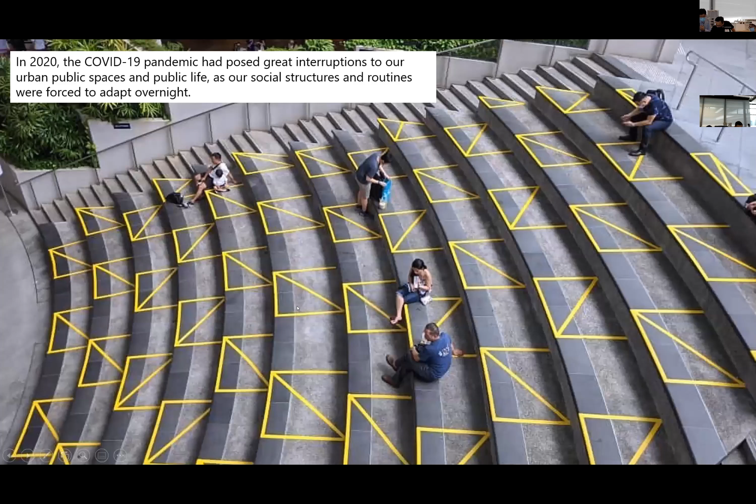As I mentioned, last year we had a lot of new challenges, especially in public areas. You can see these kinds of measures being implemented everywhere. This is in Buona Vista, Star Vista. This step ramp used to be a place where many people congregated, watching performances or just hanging out. But during the pandemic people couldn't sit so close to each other, so they had these kinds of measures.

And even in the hawker center, this is in the East Coast, the very popular hawker center, you can see people spreading out. Especially as architects, we are very interested in how spaces are being used and redesigned, so you see yellow tape everywhere. I call it tape architecture. There's no such word, by the way.

But it's just how we rethink our spaces through very creative intervention, something as simple as using yellow tapes. But on the other hand, could that also offer a new kind of perspective, a new opportunity by taking advantage of fewer cars on the road, like during that time? Now I think the cars are all back, but when we have fewer cars it is good for the environment. At the same time, perhaps we can take advantage to widen the lane and create better public spaces so people can be more spread out.

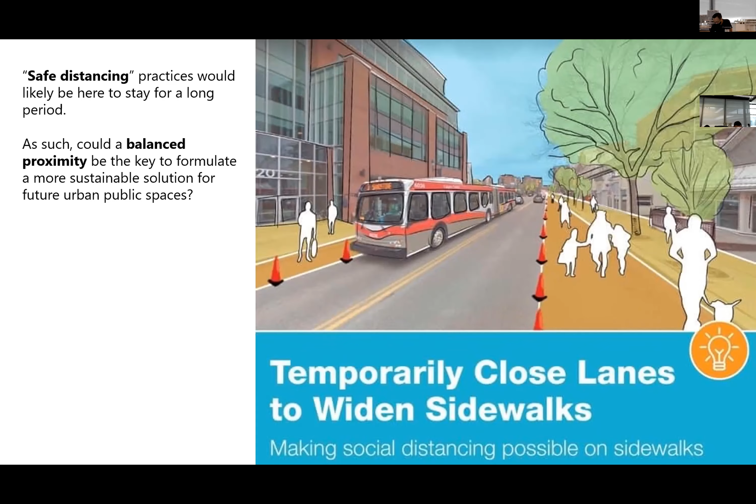So one of the ideas we discussed is using soundscape. Sound, as you know, is very intangible. We hear it, we can't see it, but can we use sound as a way to restructure and rethink our public space to create a new form of urban conviviality?

Our studio is looking at adaptive public furniture, furniture design that can adapt to different situations. Let's say two years later we are back to large scale gathering, so we can rearrange some of this furniture to adapt to the situation. As we are opening up, we can also see how different furniture layouts can induce different kinds of public behavior. At the same time, we don't want to get rid of public life, social life. We want to bring back public life, but in a safe manner.

So how can we do it safe and sound? Pun intended.

So what happened was, URA at that time, we were already discussing that we want to help see how our design can improve the Marina Central area.

Have you been to Marina Central? I see not, how many of you haven't been to Marina Central? Oh, you haven't, are you from overseas? But it just never happened that you wanted to visit the place. Oh, actually that's a good example. How about you, where are you from? I'm from India. I came in 2019, and then in 2020 the lockdown started. Oh, probably didn't get the time to go. You don't get a chance to go, right? And also perhaps there's not much incentive for you to go down. So some of you who've been there before, do you think this is a place you want to go often?

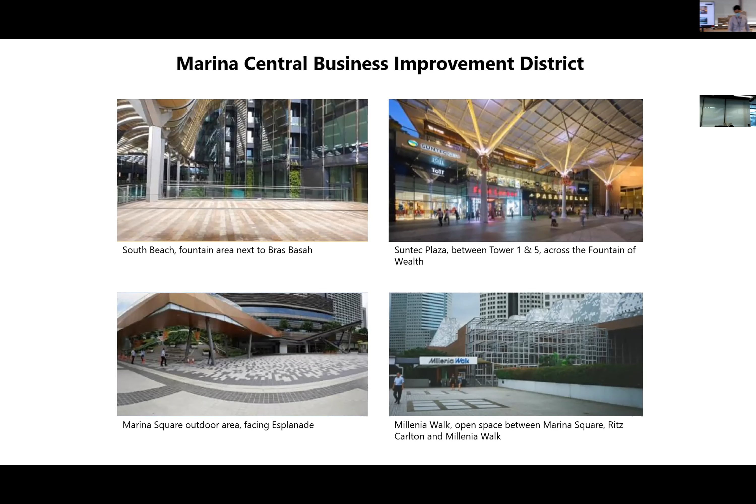We also introduce more ideas on how to design with soundscape. With that, I'll hand over to Jooyoung to share more about soundscape. Hello, everyone.

I'm a soundscape researcher. Have you heard the term soundscape before? I believe it's quite new to you. Not familiar with soundscape, but have you heard of landscape? Soundscape is actually an analogy to landscape.

Can you imagine how the sounds are like in this place? Just looking at this picture, can you imagine how it sounds? It might be water sounds, might be a very quiet and calm acoustic environment, like that.

Soundscape is defined as an acoustic environment as perceived, experienced, or understood by a person or people in context. It's quite difficult to understand, right? But the thing is, soundscape is not a physical acoustic environment, but a perceived acoustic environment - it's the perception of an acoustic environment. This is quite different.

The current management of acoustic environment is mainly focused on sound pressure level, expressed in dB, decibel. Have you heard of decibel? But what does decibel mean? Do you know the definition? Actually, decibel is the unit of sound energy. So decibel shows the sound energy. The noise control approach usually focuses on reducing the sound energy.

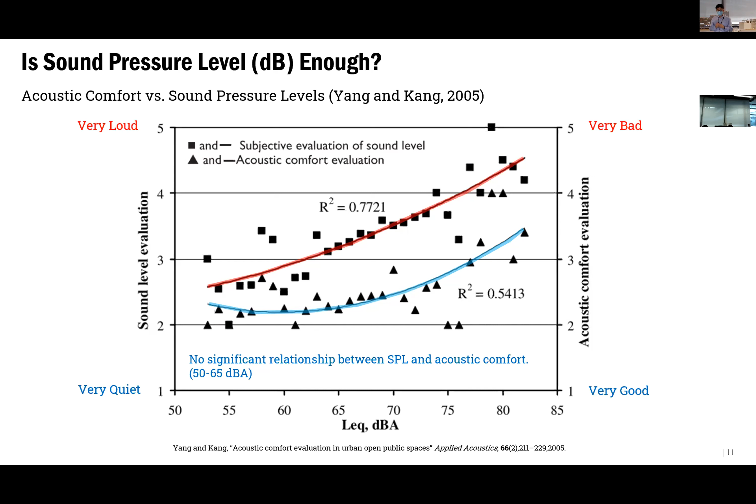So the current, traditional noise control approach usually focuses on physical phenomenon, especially physical acoustic phenomenon. But the soundscape approach mainly focuses on how we perceive the sound environment - that's the difference. We consider how we perceive the sound, how we interpret the meaning of the sound.

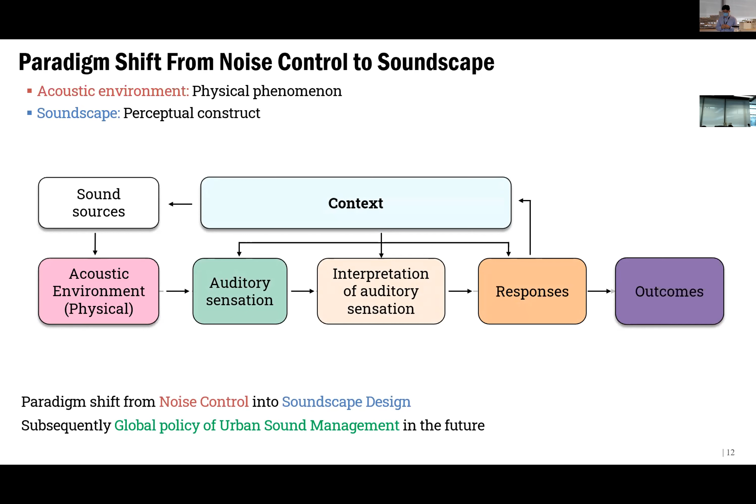Currently there's a paradigm shift from noise control into soundscape design, and I believe it's going to be a global policy of urban sound management in the future. This means city planning can no longer be content with noise control and noise abatement, but must pay more attention to the character of the acoustic atmosphere of public spaces, like urban squares, pedestrian zones, and the whole city as well.

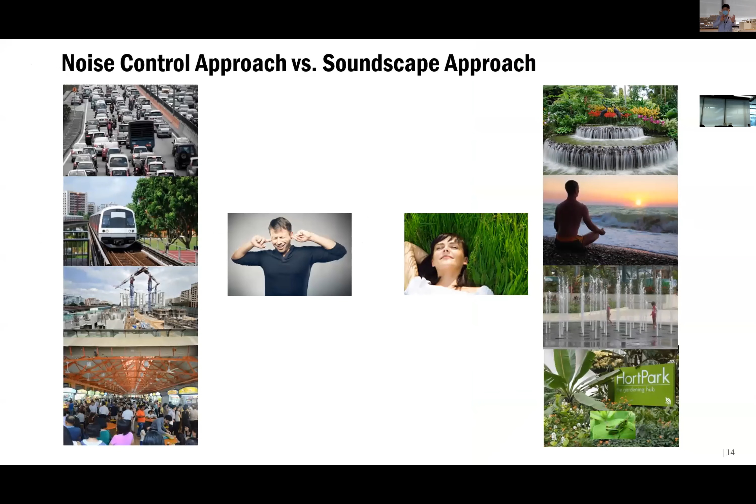What is the difference between noise control approach and soundscape approach? Noise control approach usually considers sound as a waste, so we try to reduce the sound pressure level, the dB level. But soundscape approach treats sound as a design element, so we try to use pleasant sounds like water sounds or bird chirping sound to mask out unwanted noise like traffic noise.

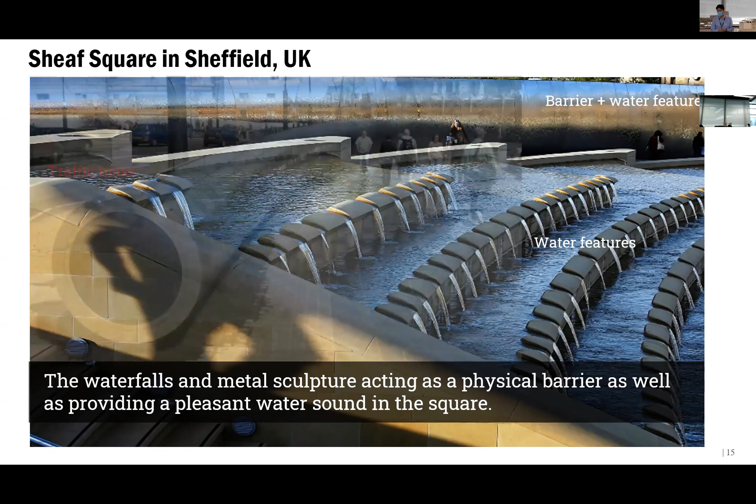I'd like to share some examples. This is Sheaf Square in Sheffield, UK, a very famous soundscape design. Can you see this steel sculpture? This sculpture plays a role as a sculpture as well as a noise barrier.

As you can see, there's a traffic road. This sculpture blocks the traffic noise as a noise barrier and produces a water sound like this. If we add this sound to the traffic noise, then you can hear it differently. Or you can also add bird chirping sound, which means adding natural sounds can reduce the annoyance of traffic noise. That is one possible way to enhance the acoustic environment.

The concept of soundscape design can also be applied into artwork. I will give you an example.

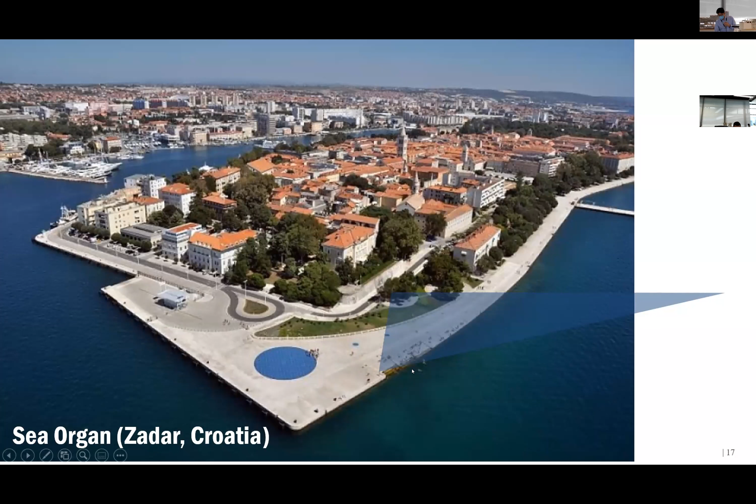I'd like to share the last soundscape design example. This is called the Sea Organ, located in Zadar, Croatia. Can you guess what it is? This is the Sea Organ, they made an organ, and the sea waves play this organ music.

Let's see what it is.

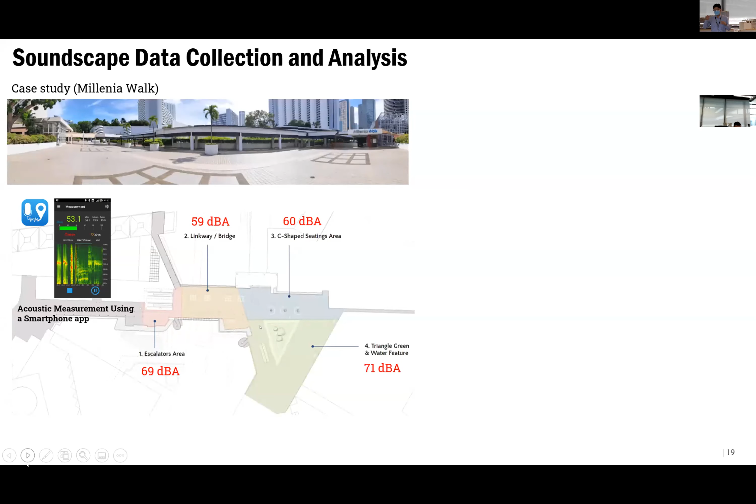In this studio, we adapted the concept of soundscape. What we did was collect soundscape data at four different Millenia Walk sites, measuring the actual sound pressure level at each position using a smartphone app. After that, we conducted a soundscape survey to identify sound sources and perceived acoustic quality, whether it is pleasant or chaotic, dull or monotonous. Based on this data collection, the students proposed their soundscape design in this context.

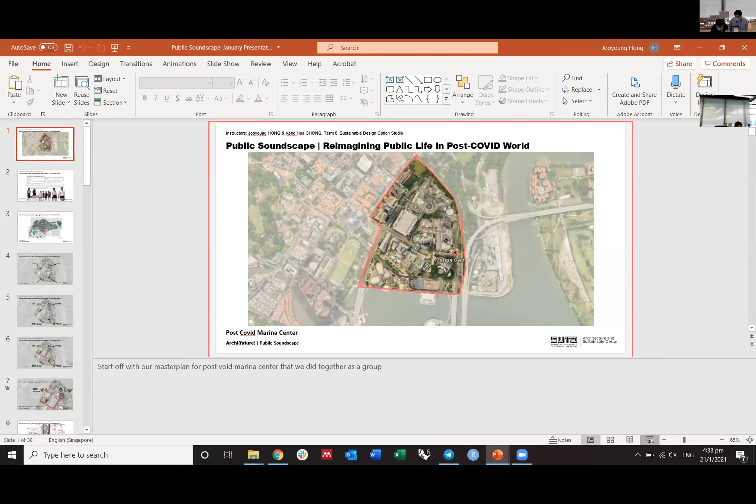Hi, for today I would like to present this post-COVID Marina Center master plan that we did together as a group. I'm Nang U, a graduated senior.

I did that studio during the lockdown, slightly after the lockdown, so it was quite an interesting experience because usually in studio you all come together in a studio setting, but at that time everything was online, so you're sort of disconnected from everyone. By the time you guys come into architecture, I think COVID will be more or less gone, so you can experience the true studio culture, which will be quite fun.

Okay, I will move on with the presentation.

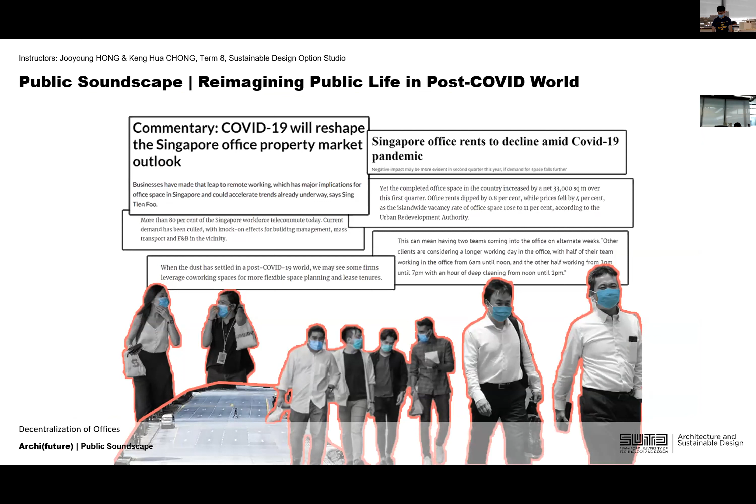With this COVID situation, there's a rising trend of declining office rental rates within Singapore, especially in Marina Center, which is largely an office space area. A lot of office spaces actually started to decentralize and move away from the city center, so Marina Center ended up with a lot of empty office spaces that can be utilized for other users.

What we as a group propose is that we can potentially lease out these office spaces to NGOs that are located all over Singapore. This will help bring their headquarters inside the Marina Center and set up a centralization of activities that can happen in the Marina Center.

This ties back into our studio's objective to rejuvenate the Marina Center by introducing newer demographics that are currently maybe alien to this area, such as marginalized communities, and the activities they bring along will actually help to rejuvenate the space for the public as well.

These are the four public spaces that we identified as a studio, and each of them has a role to play to support and accommodate the different activities by the NGOs and the different demographics they are targeting.

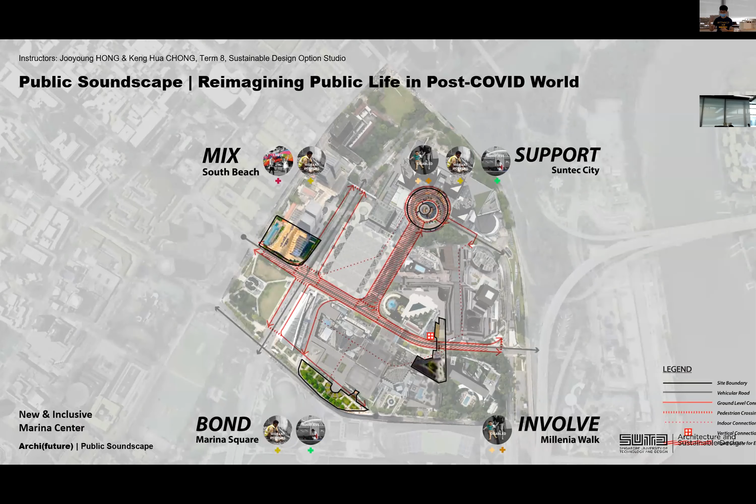So this will actually set up a support node within the Marina Center itself as an inclusive and inviting space, not just for the marginalized community, but also for the public to come together.

So for today, I will focus on one of the nodes, which is at South Beach, redesigned as an urban stage. This is the current context of the area. It's a very good location, very well connected, with good use of the World War II Memorial and the Esplanade as well.

My design goal when approaching this project was to rejuvenate this underutilized public space by introducing new programs and activities for the marginalized communities, in particular the LGBTQ communities and the migrant workers, to provide a space for them to come together and celebrate their causes.

The space will also be redesigned to accommodate those activities I was talking about, and the public can also come together and use the space as well.

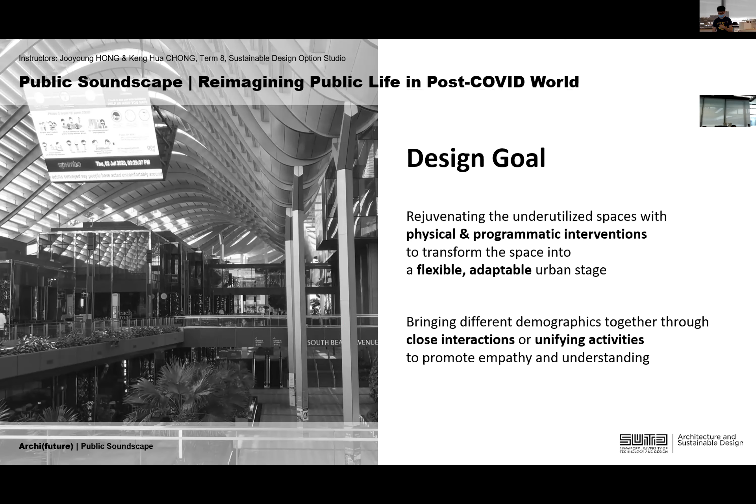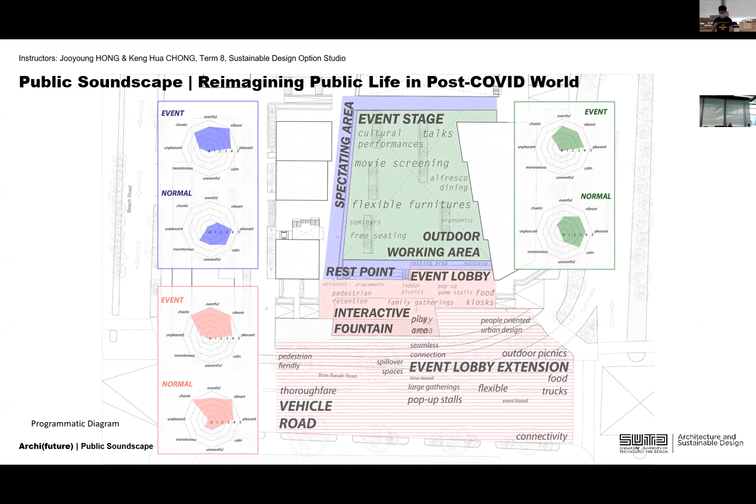So this is the current state of the South Beach. And this is the new programmatic proposal that I'm proposing, with different soundscape atmospheres I want to achieve for the different areas. We also identified the different stakeholders involved in the scheme.

For this exercise, other than proposing the physical interventions, we also want to propose the software behind the strategy by showing how the different stakeholders can come together and make the scheme work.

So I will move on to the design of the space itself. A little bit of historical context: the space actually used to be a swimming pool back in the colonial era. The sunken courtyard you see is actually the swimming pool with the water drained out, and there used to be a diving deck that was unfortunately not preserved during the redevelopment.

All these historical contexts will actually serve as inspiration for the design language you will see throughout the space.

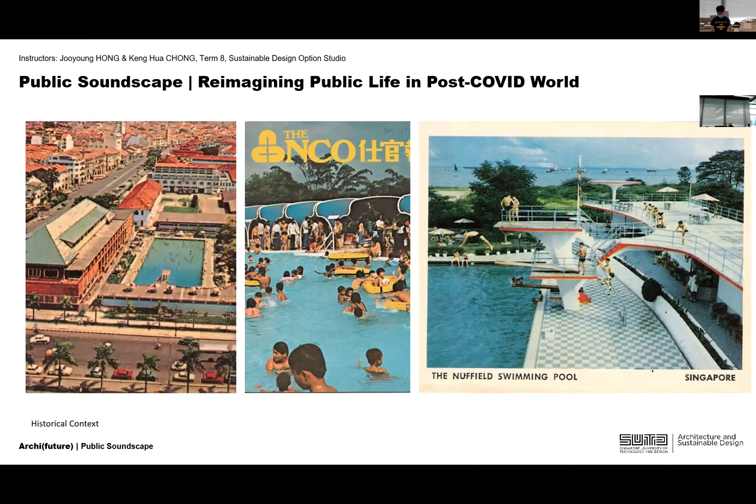The intervention spans across different layers across the 3D space. The first is what we call the future-proof public space. This is the new floor mural applied to the sunken courtyard where it used to be a swimming pool, a tongue-in-cheek reference back to its historical meaning.

So the next layer is the public furniture. These are designed to accommodate the different uses that will occur with the activities happening there.

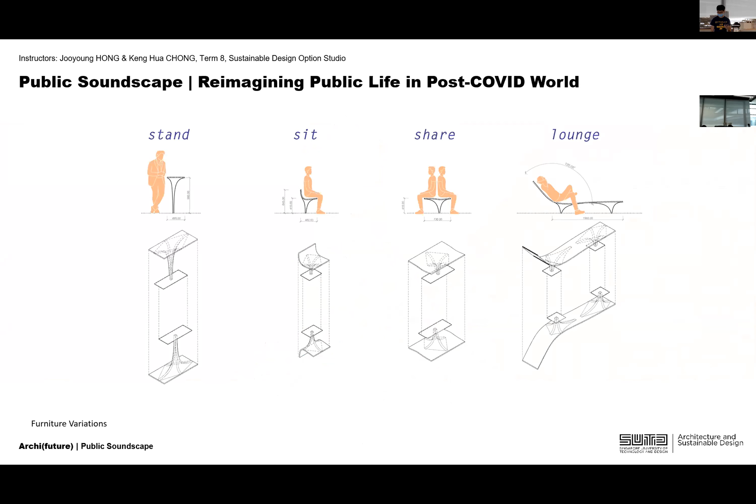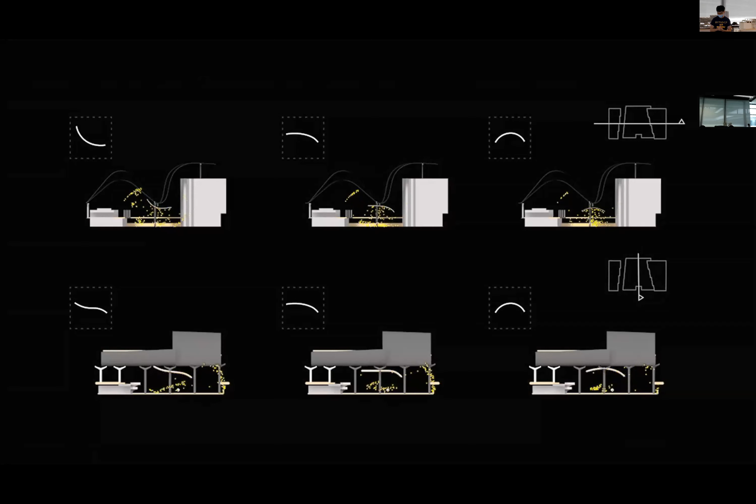The last layer is the acoustic reflectors. To provide good acoustic conditions within the stage, a few different profiles are tested to find the appropriate shape of the acoustic shell. Through ray tracing of the sound wave, we can work out the optimal profile needed to improve the acoustic condition within the stage.

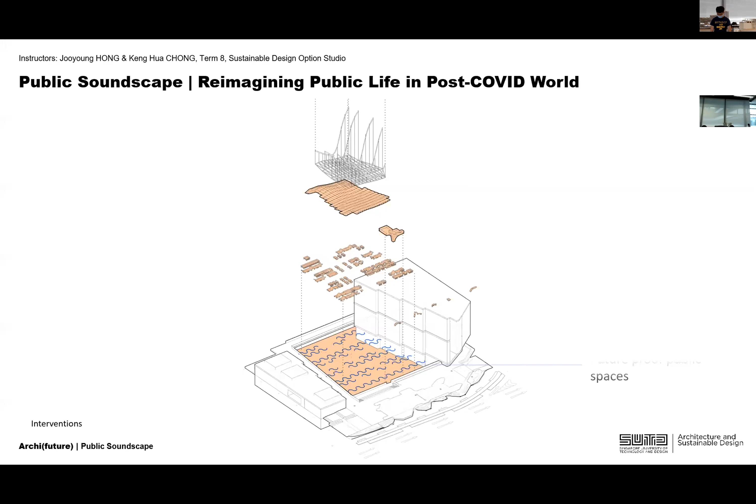So what this will help is to make the space suitable as a proper stage to host events and activities. These are the different layers I brought you through just now. Next, I will move on to the activities that I'm bringing into the urban stage.

So this is the redesigned South Beach, and as you can see, different activities can happen according to whether it's a normal setting or event setting.

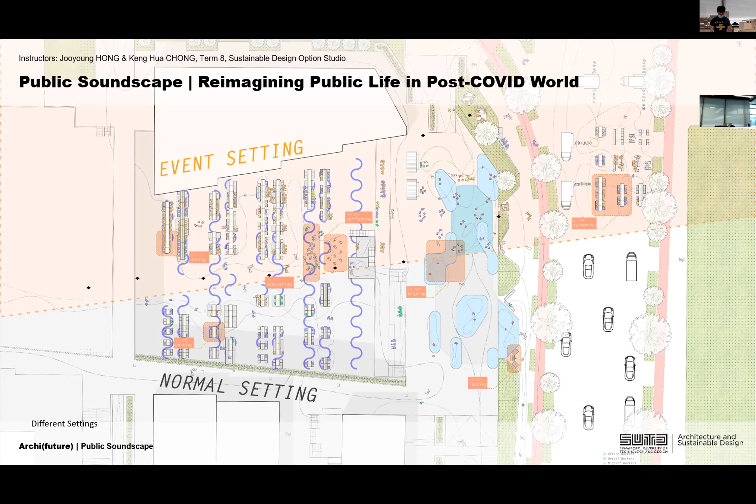During a normal daytime, the space can be used as a working space for office workers, like an outdoor working space. The tables can also come together during an event setting to form a space for celebration and dining.

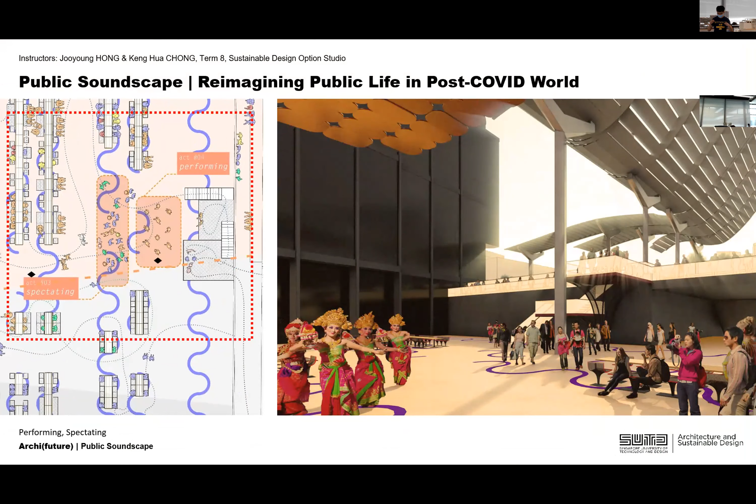The acoustic reflector and the viewing deck make it suitable as a stage condition, whereby celebrations and performances can take place. The activity can also spill out into the upper deck area with the water fountains, setting the stage for gatherings and celebrations.

So this actually shows the atmosphere inside the urban stage during the normal setting, whereby this is used by everyday office workers to come together and do their work. And this space can actually transform into an event space where celebrations can take place.

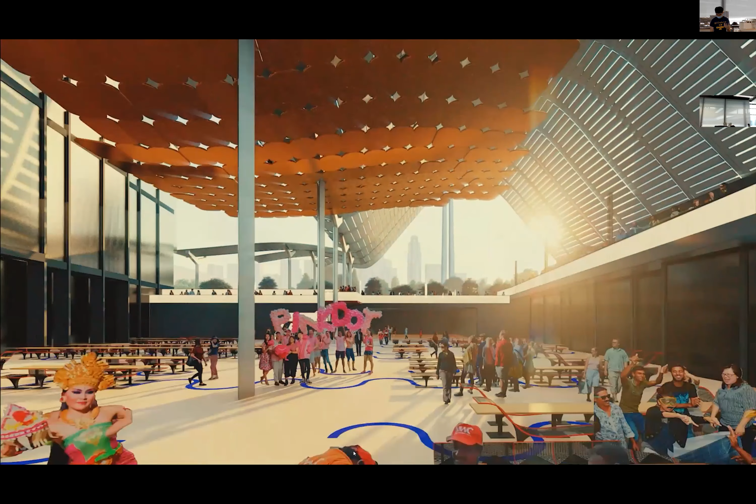The event can spill out into the upper deck as well, as I talked about. So this water fountain area and the pathway were used as a thoroughfare during the normal setting. But during the event setting, the activity can spill out even onto the road itself to accommodate food trucks or other activities.

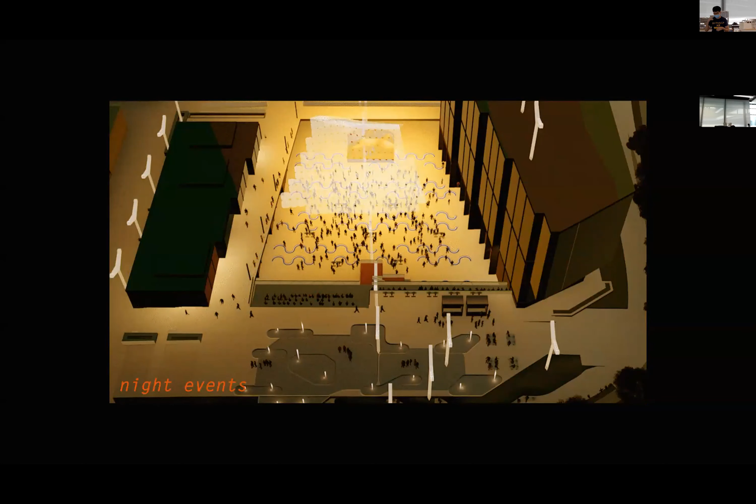So I believe a good public space is actually an adaptable one that can accommodate different users. And the different layers of interventions that I introduced just now can actually come together to set a stage for different activities that happen across time. So what this helps to do is inject flexibility and resiliency into the public space.

So yeah, with this I end my presentation. Now I will hand over my time to Yunjie, who will talk about her project.

Sharing. Oh, it's really shared.

Okay, hi, I'm Yun Jie, and I graduated last December.

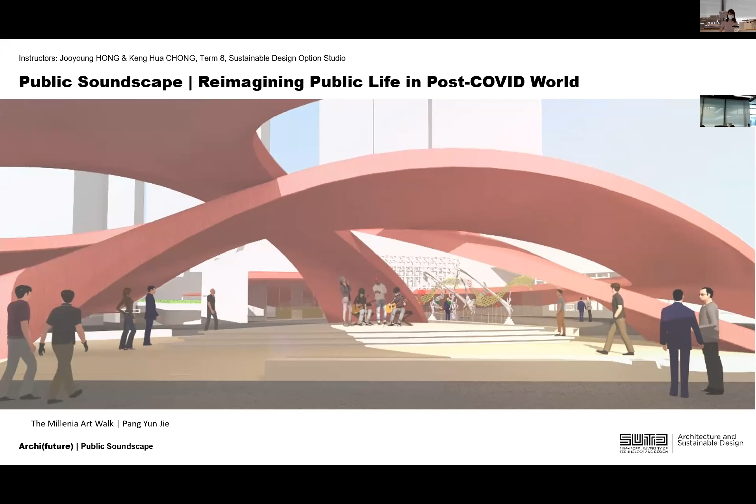My project is the Millenia Art Walk. The design aims to bring people transiting through this space to slow down and engage with different forms of art. The Millenia Art Walk is part of a bigger master plan that my group proposed, which is to rebrand Marina Centre as an arts and culture hub.

So not only is art a source of entertainment, but it also helps to strengthen ties and set us on a competitive edge globally. So even in a time that is uncertain and anxious, the arts have kept people engaged through online means, sharing music from the comfort of their homes. This shows the valuable role art plays in our mental well-being.

My group first looked at what are the existing art forms around the site. These are the common ones in that area. Most of them are sculptures, and we find that interaction with them is often passive, such as photo taking and viewing.

So what we wanted to do was introduce small scale interactions throughout the journey for two main goals: to increase interaction with artists and art pieces, as well as to encourage the public to space out into different nodes, which is safer in this COVID context.

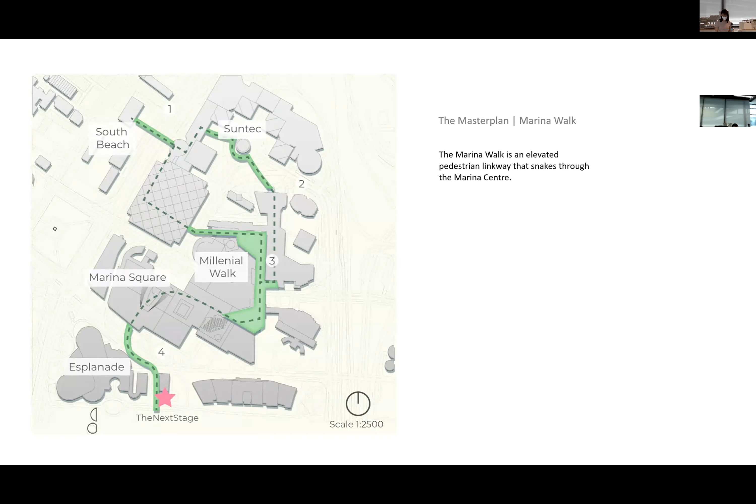And the strategy is to use sound as a medium to elevate this experience. So this whole journey begins from South Beach, through the Sky Park in Suntec, around the Fountain of Wealth, down to Millenia Walk and to the Boardwalk at Esplanade. So different sites have different types of art forms, and this provides distinct experiences for the visitors.

Each of my group members took a site, and the one that I proposed for was Millenia Walk. My key design is this sculpted canopy that responds directly to the site analysis that I'll be sharing next.

Coming from Suntec City, you'll arrive at Millenia Walk, which is a transitional node that brings people from all walks to this site. There's also a fountain here that adds positive sounds to that space itself.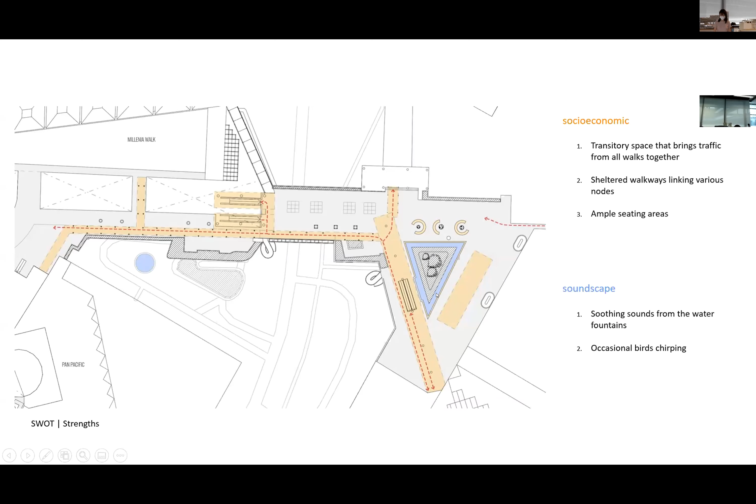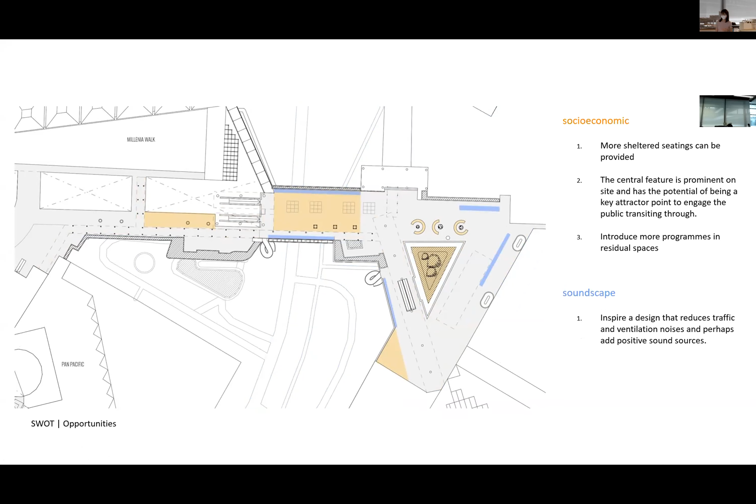So the design strategy includes these 5 elements: incorporating art programs, activating the central site, providing shaded sitting areas, and in terms of sound, reducing traffic noise along this route, as well as ventilation noise around this area.

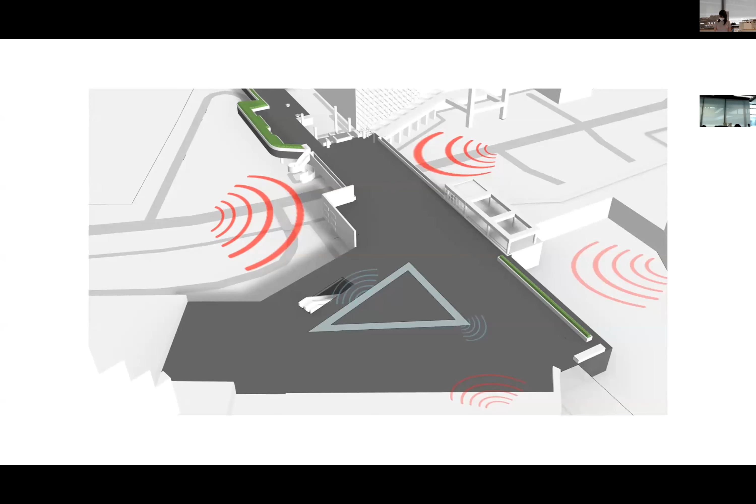Moving on to the design process. These are the negative noise sources around the site. The areas highlighted in blue are the areas where I anchor this canopy onto the ground itself. These areas act as a noise barrier to the traffic noise as well as the ventilation noise.

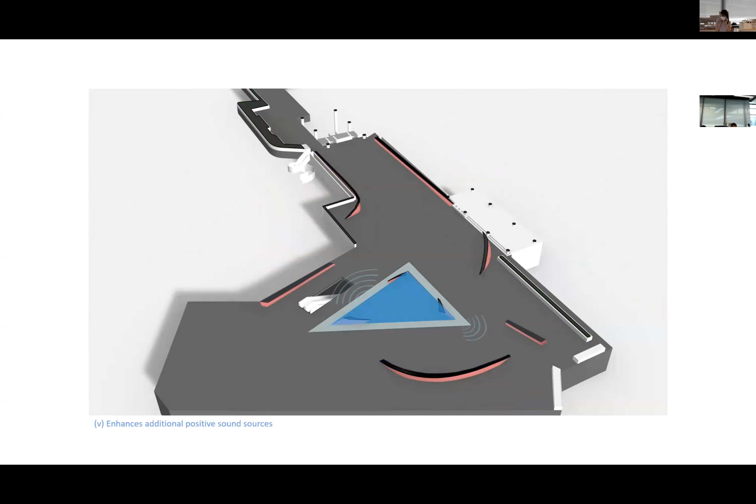On top of that, I will activate this central region by adding positive sounds to the space. The areas highlighted in orange are the residual spaces that are not used, and hence I introduce art programs to these areas as well as adding a central space.

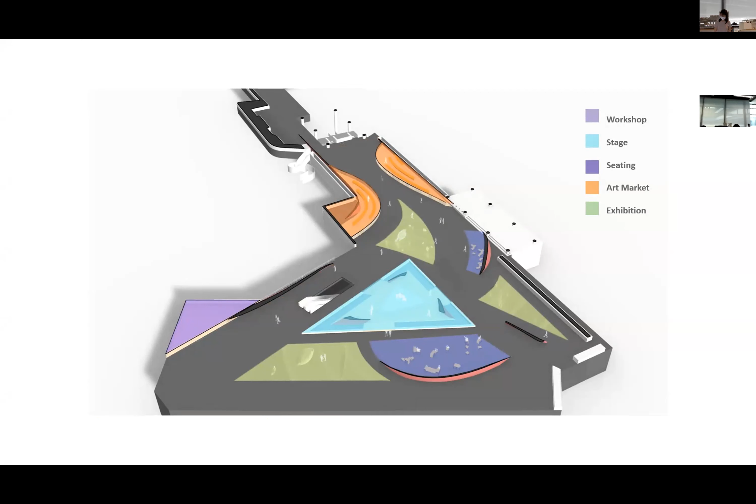So these are the programs that I propose to the site. Coming from the Marina Center, there will be a workshop area, a space dedicated for workshop. Moving down, there's a central performance stage, ample sitting area that are sheltered. At the back, there will be an art market that is highlighted in orange.

Remaining spaces highlighted in green are outdoor exhibition space where sculptures can be exhibited at. So the overall canopy design is sculpted in a way to provide good acoustic environment for the performance itself, to block off traffic noises, and to provide shade for the whole area. And not only that, it's to draw people from all walks to this central stage itself. So this is how they all come together.

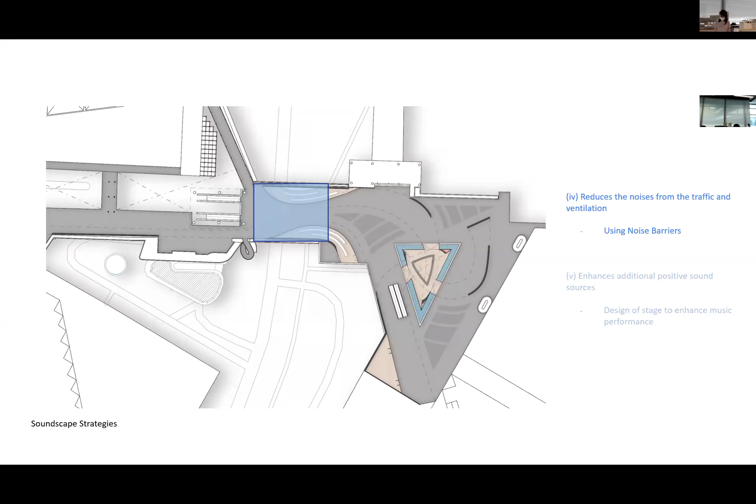Noise simulations were carried out to understand the effectiveness of this acoustic shell. So these two main areas, one is at the overhead bridge. This simulation was carried out to understand whether this acoustic shell is effective in blocking off this traffic noise. The red point is the sound source and the blue is the receiver.

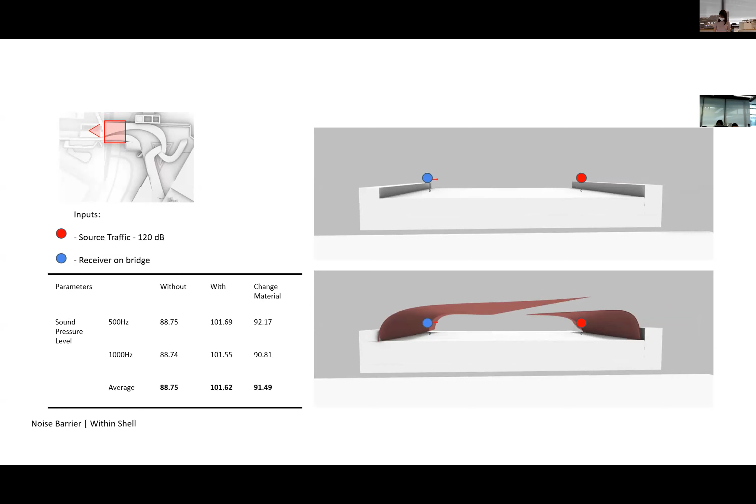So without the shell, the sound pressure level is much higher than when there is the acoustic shell. With the acoustic shell, it actually blocks off direct sound wave coming from the source, and hence the sound pressure level measured was minimal. Apart from that, I also looked at how this shell affects the acoustic environment within the shell itself. With the acoustic shell, it's actually louder, but by changing the material to something that's more sound absorbent, the sound pressure level is reduced.

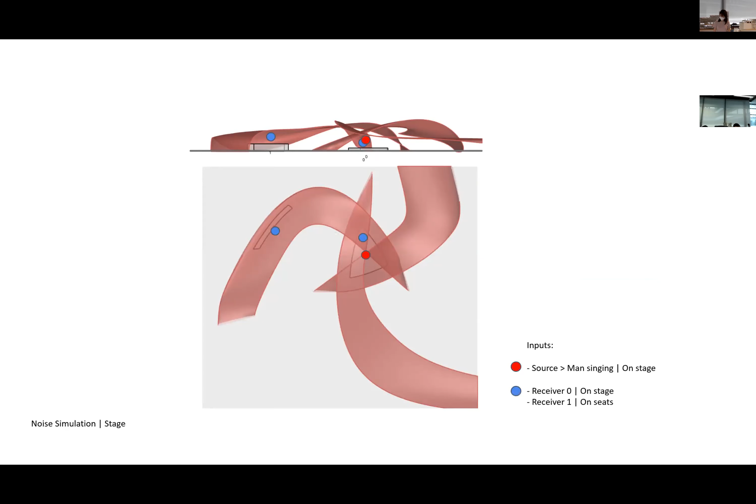So subsequent iterations, 2, 3, 4, are done to reduce this reverberance value. Number 2 is when I lift up the edges. 3 is to pull them apart, so there's a little gap in between. And 4th was to reduce the width of the ribbon.

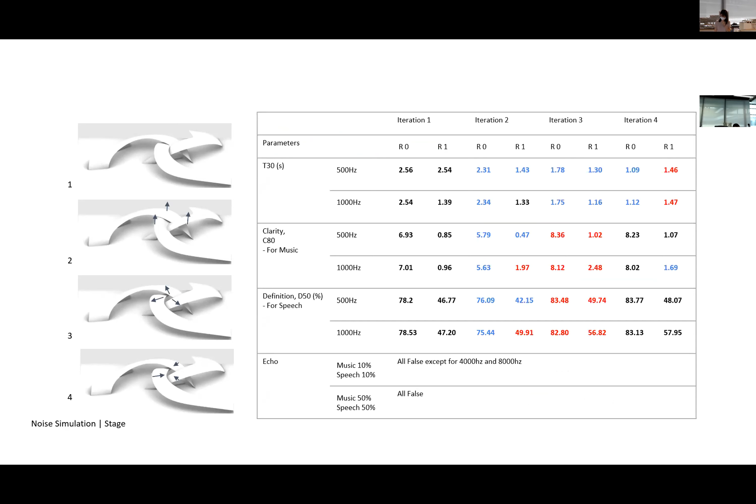Apart from that, I considered other design considerations, focusing on the central stage itself, looking at how people circulate through this space. Iteration 1 shows the positioning of the anchor, which blocks the circulation path. By changing it, the view towards the stage is blocked. So there were multiple iterations to make this space a meaningful one.

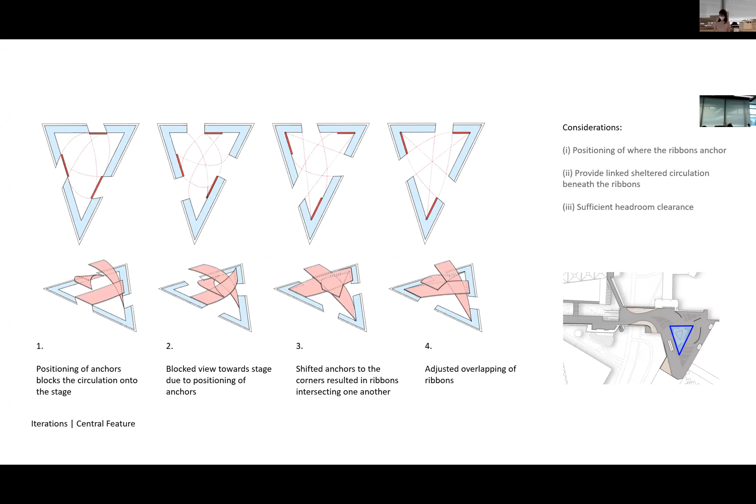So this was the final iteration that I came up with. This area is where the 3 strips come together, providing a sheltered circulation space that links these 3 strips together. There are also spaces like this away from the main circulation - places where people can go if they want closer interaction with the performers.

When the stage is not in use, it's a convenient space for exhibition or for people resting, and they can enjoy the fountain sound at the same time. This is the view towards the stage as we walk towards the seating area. This is the view of the stage itself - the sheltered walkway, the ramped entrance.

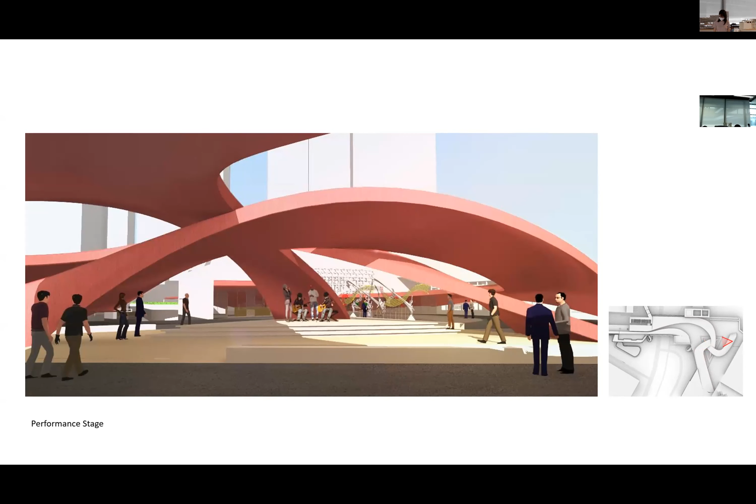Also designed urban furnitures that take inspiration from this string furniture as shown on the right. This furniture, these five of them, are modular, so they can be oriented in different ways to provide different sitting heights for different users. They are in multiples of 300 mm, so they can be pieced together to cater for different needs.

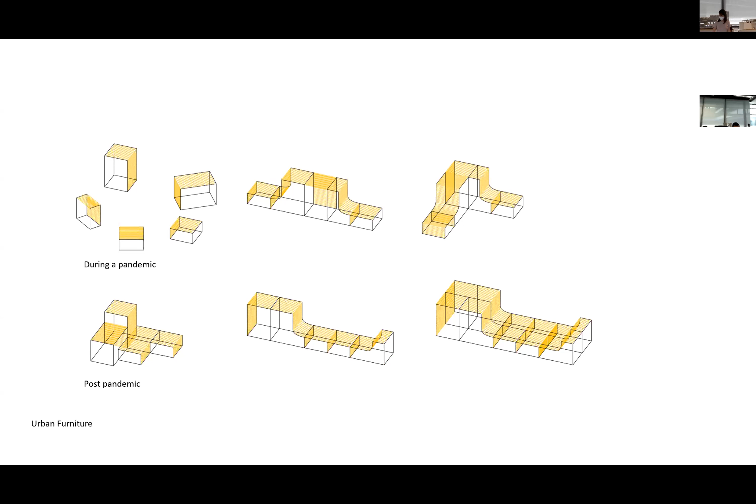For example, during a pandemic, it can be placed apart or placed in a way to encourage social distancing. In the event of post-pandemic, they can be placed together to encourage interaction. So this is how the furniture looks on site - designed to look very lightweight, so they complement nicely with the shell itself. And this is the art market with sculptures being exhibited along the area so that people can interact with it as they walk through the space.

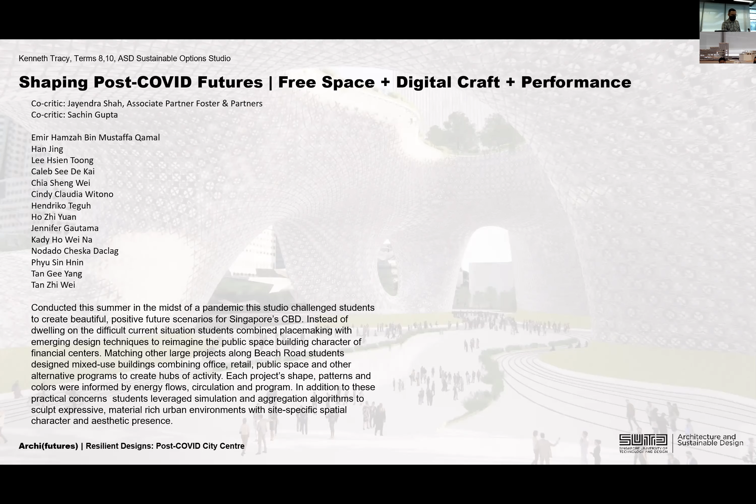In the pre-COVID days, we had some option studios where we made stuff. So this is what we called a membrane tensegrity shell. Students, along with myself, made this project in 2018. In the good old days before COVID, we could come together. We made this project and actually had it as part of the space in which we held the final review. So we had the opportunity to come here and do that.

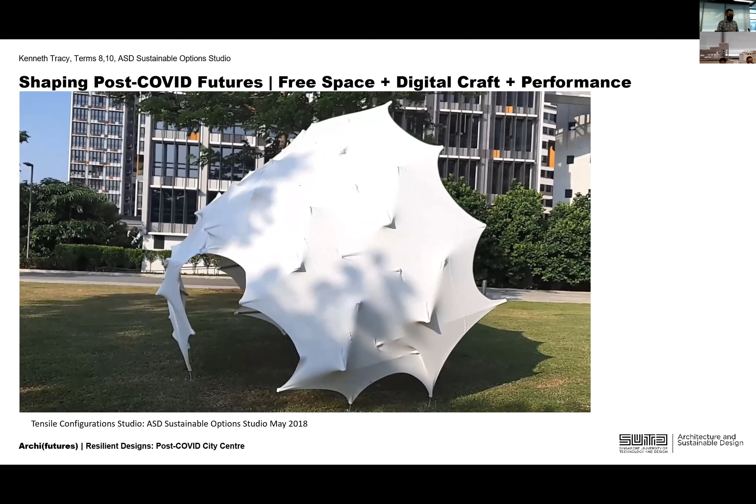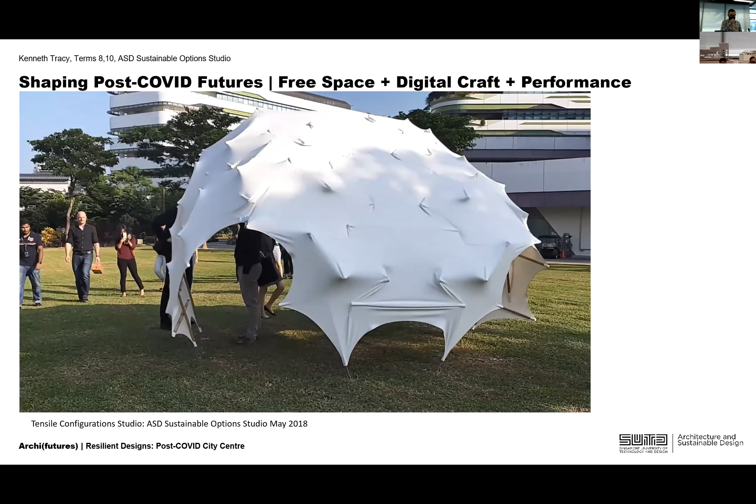So we designed this project using simulation, both simulating the environment and how it interacts with the building, and simulating the structure so we could make new forms. Here you can see the studio gathering for the final review for this project. And so this is not possible during the studio.

And then, in science fiction, everything glows for some reason. We can make everything glow now, and I don't have any glowing clothes on, and it's 2020, right? So maybe we'll never have glowing clothes or things like that—and of course we can if we want to, and that was possible 100 years ago.

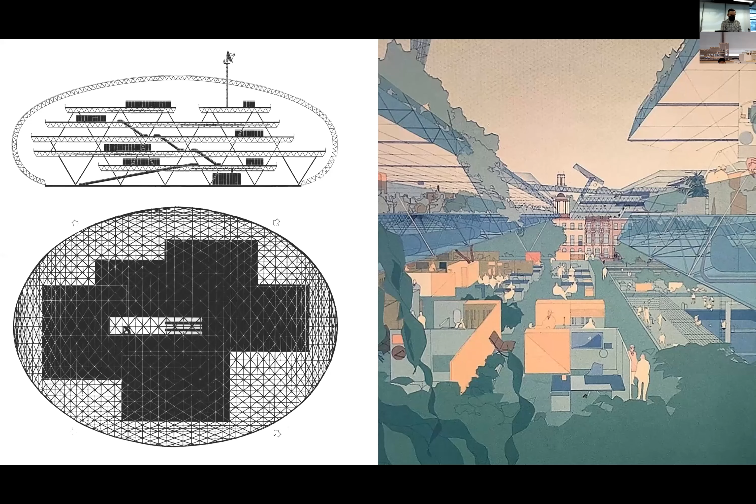Architecture, I think, can do the same thing, rather than represent the single corporation that sponsors a building. Maybe architecture could be more like an art installation, like a Banksy installation. So we took on a space right next to the Beach Road project and across the street from Suntec, in the same area as the previous studio, and we were trying to reconsider what an office building might be.

The planned office building is right here—it's the Guoco Tower. It looks like an office building. It is not questioning the premise of making a rectangular block of office real estate infrastructure, though it is nicely done. Norman Foster, who founded the firm that Jahendra—my collaborator—is working with, proposed buildings early in his career that totally dismantled the kind of stack of an office building and imagined a kind of landscape of office instead.

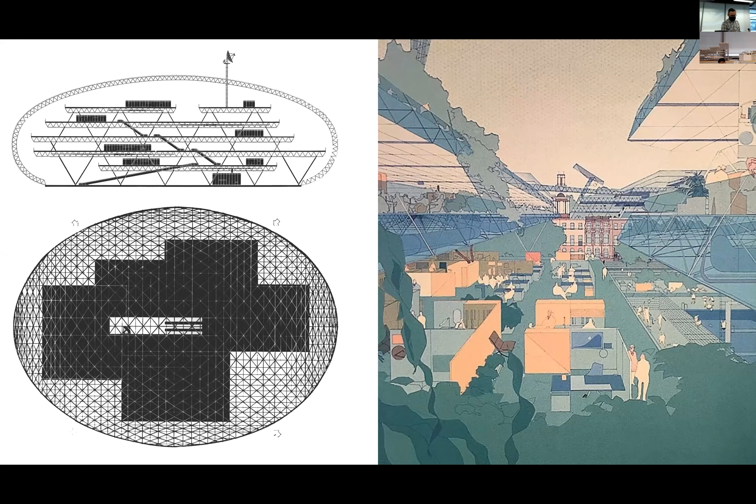The Marina Bay Sands, for instance, also has this effect—it's effectively a horizontal and vertical skyscraper.

When imagining these spaces, there are three aspects we looked at in the studio. Students made what we call a tactic—a digitally manufactured unit or system that could be used in the building to create character and place. They also looked at an artwork as a reference, so they could create work with a referent to art history that offered something to the city, like street art.

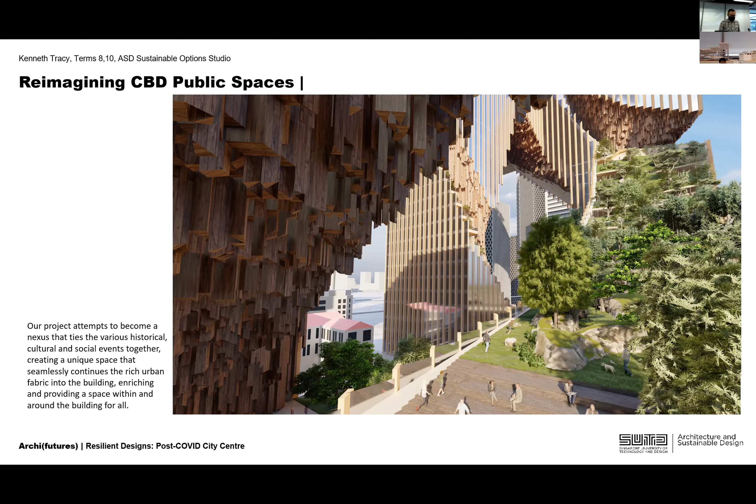This first project, Reimagining CBD Public Spaces, is by Caddy and Chong. It had the idea to take all the space in the city given to parks and park connectors, and allow that space to infuse more deeply into the center of the city.

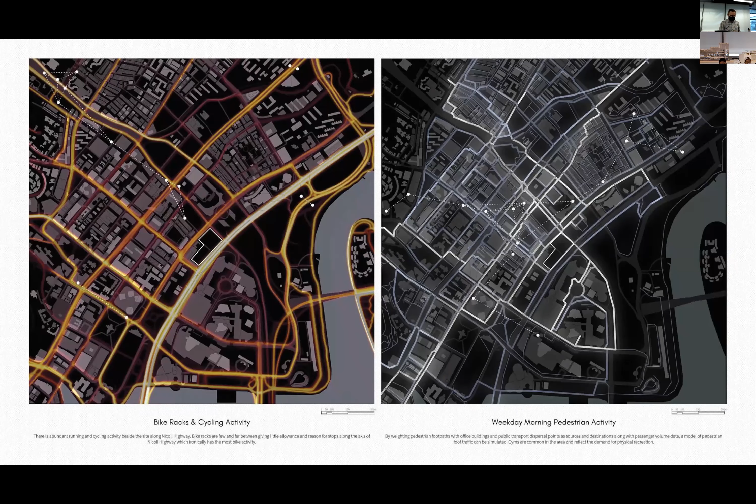The students did intensive mappings of public space and pedestrian activity, bicycle riding, public space, and underground spaces, then combined this idea of how things moved with how the building might be perceived and what intensification of space might be possible.

They looked at the sublime, a movement in art concerned with the ruggedness and vastness of natural space, and how they could combine that with a building in Singapore. They looked at Bukit Timah Hill, the tallest hill in Singapore, and juxtaposed that with a building—interesting to consider this tall natural feature relative to buildings in Singapore.

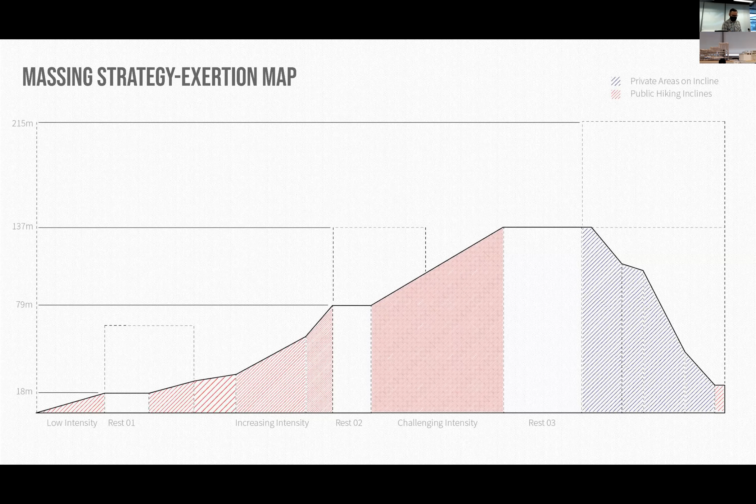They came up with a strategy to look at how activity like hiking could be juxtaposed with the planning of a building almost as a hill. This is a diagram of a hill for exercise, and these are all the places in the building intersecting with that.

This is articulated through what we call the tactic, using software to aggregate different pieces of wood automatically in very large groups to create a texture somewhere between a building and a natural space.

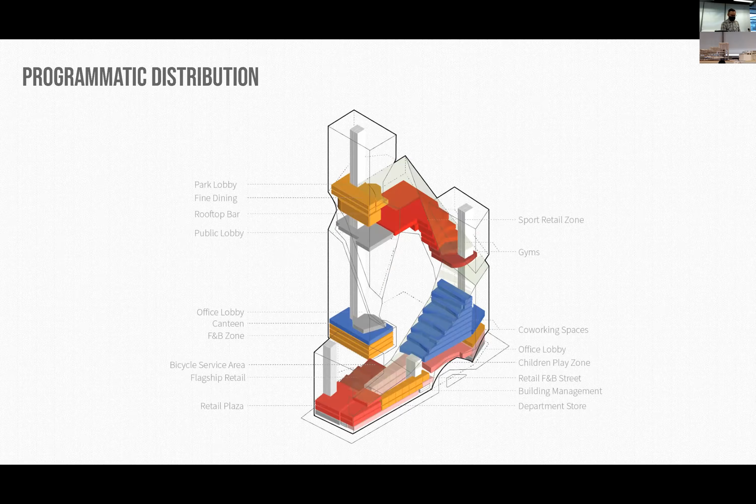This is their mediator—they articulate the building and create this mediator volume texture, then wrap the alternative program around it. The other program, not these alternative spaces, is rentable office space, creating a series of tower and horizontal volumes interspersed with a sort of public hiking park.

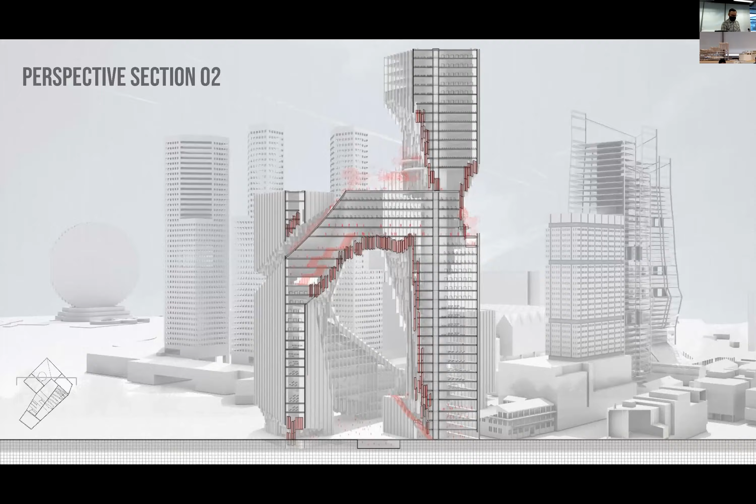This allows the public park space to be interwoven with the building, creating interesting juxtapositions—things smashed together that you wouldn't normally assume in the city.

So there's lots of trees and people working in offices, which is not that uncommon, but the way that the project interweaves them displaces and maybe exaggerates the quantity of that move to create green space in offices. Also, I think it's very sensitive to the views of the city relative to the massing of the street.

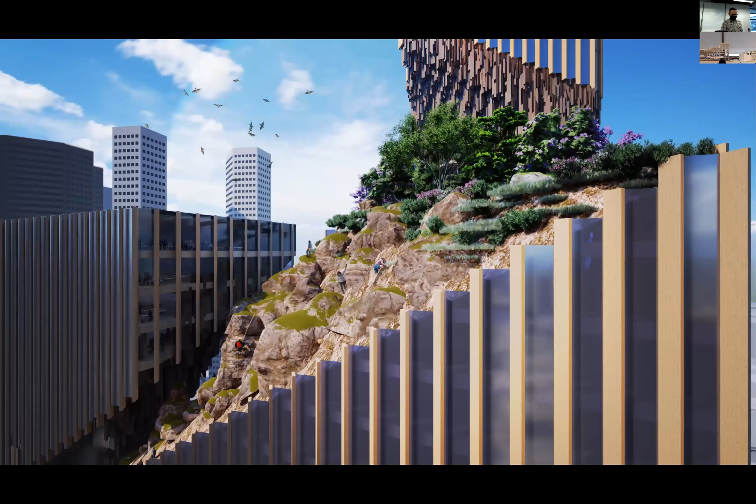So you can see the building and how it wraps the sort of plaza at the entry. This is like the entry of the building, and then this is a sort of hiking trail and a sort of climbing trail. The pinnacle, there's a kind of waterfall there, and looking out back at the city. So this is creating this sort of sublime reality within the sort of infrastructure of a typical office building.

So the next project also uses wood, and the elements of wood that are the sort of tactic in this one are the columns and beams that the project is made out of. And the idea is to sort of make, in this case, a sort of social platform. So rather than have the office building, which is very tall, be only platforms for office workers, this is a platform for the public as well.

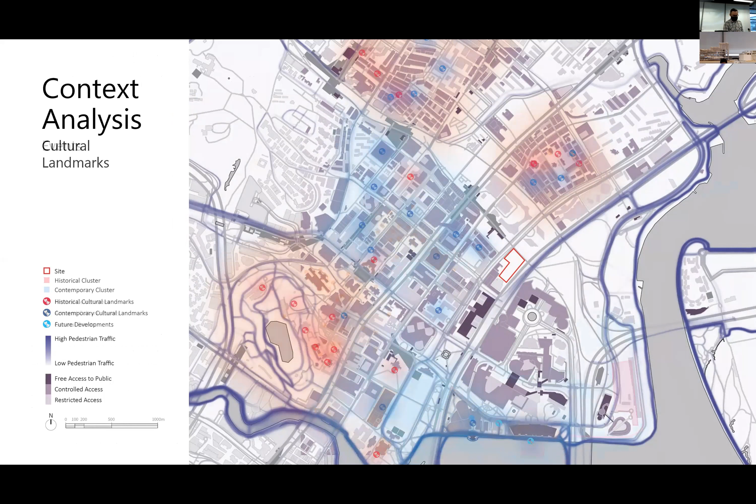And they do that by mixing these events around the site with a sort of set of atrium and overlapping spaces within the office building. So they have this idea of turning spaces into places, and a place to look from, and a place to look through, and a place to look to.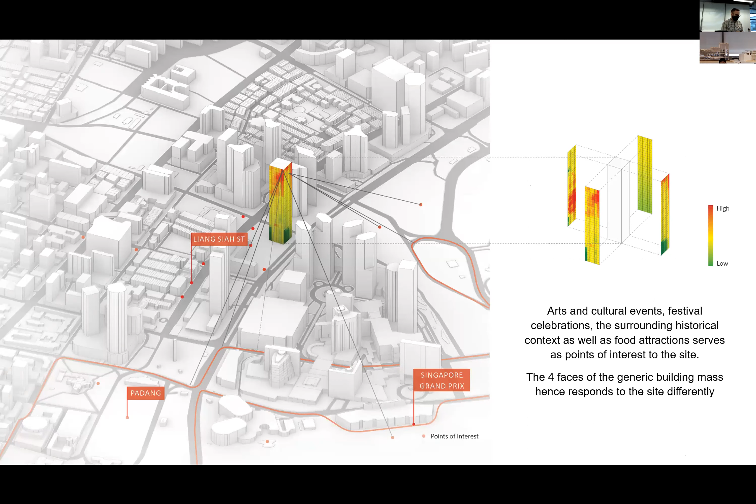So just like people watching or other things like that, they imagine that if things are happening, you might want to be in a place in the building where you can publicly then look at something that's maybe happening in the city. And they looked at all the things that happen in the city and in those kind of views, and they juxtaposed that to a volume that would make sense in the context there.

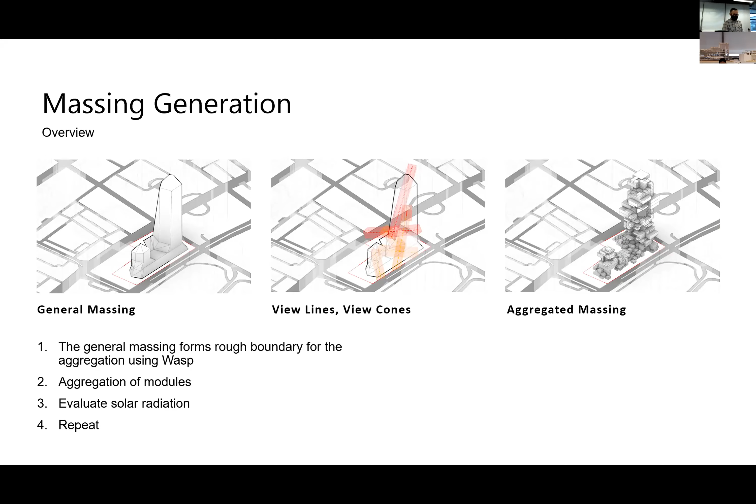And this is sort of basically a big pile of those platforms interspersed with openings that view into these different event-prone areas of the city. You can see how instead of a vertical stack, you get these crisscrossing voids that allow for people to be working in their office, looking at people doing a different kind of office activity or other activity, and then looking back out into the city.

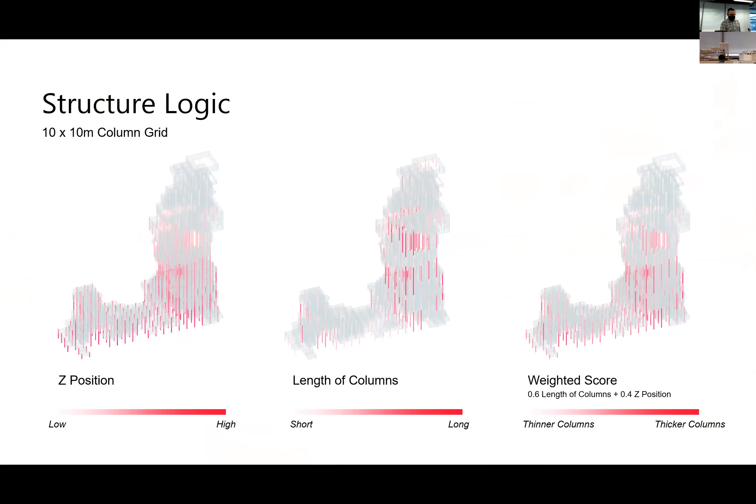To do this, they analyzed the kind of platforms and then added a set of columns. And this is a sort of set of social space conditions that they were interested in.

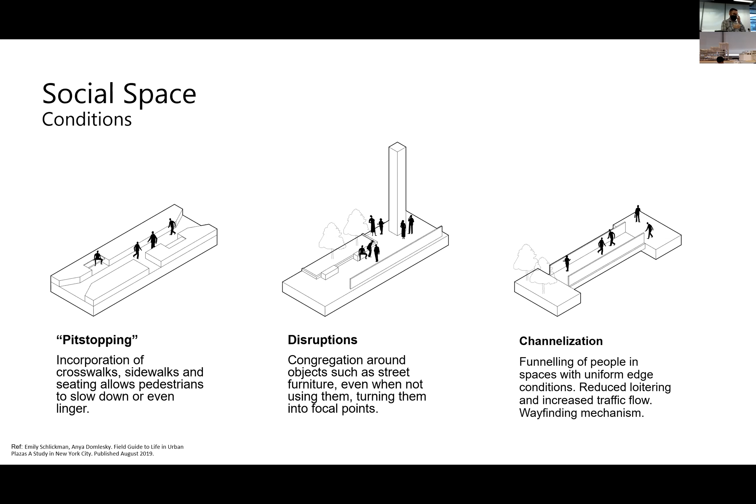There's a longer list of these. You can see that again on the website, but there's a kind of index of how to make certain types of social conditions within the building in a language of not just making the right platform that gives the space an opportunity, but to create certain types of space that they understood as promoting social interaction. And also, this has the ability to add more maybe variety of spaces so that you can imagine other things besides just office work happening in these spaces.

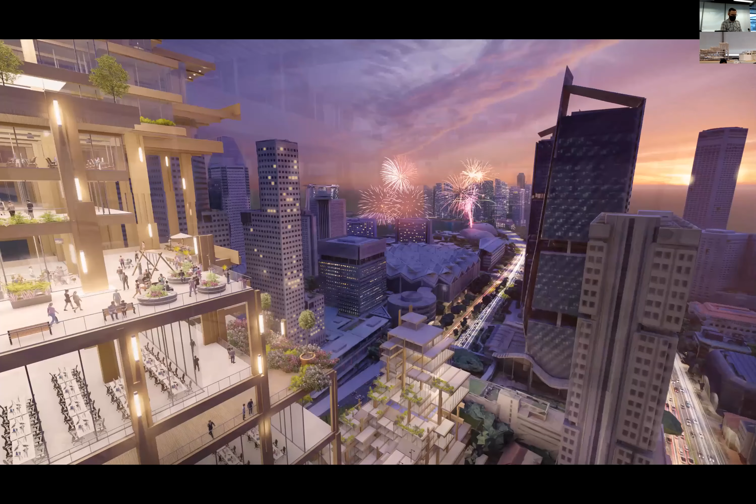And from above, looking through at one of these sort of atrium funnel view cone spaces at the top during an event. And you can see the basketball court in the lower left there, where, yeah, there's a sort of sports hub. And the idea would be to bring activity juxtaposed to typical office work into the city there.

So one more project. Most of the projects were, or a lot of the projects were looking at wood and how that would be a sort of tactic, in this project it's wind and a simulation of soft material like fabric to create a space. And so the idea was to create a hub and to make the hub an open plaza that's as basically flat and connected to the street as possible, and pretty much a void, but a void that had more breeze and had more shade than you would normally have in a public space in Singapore.

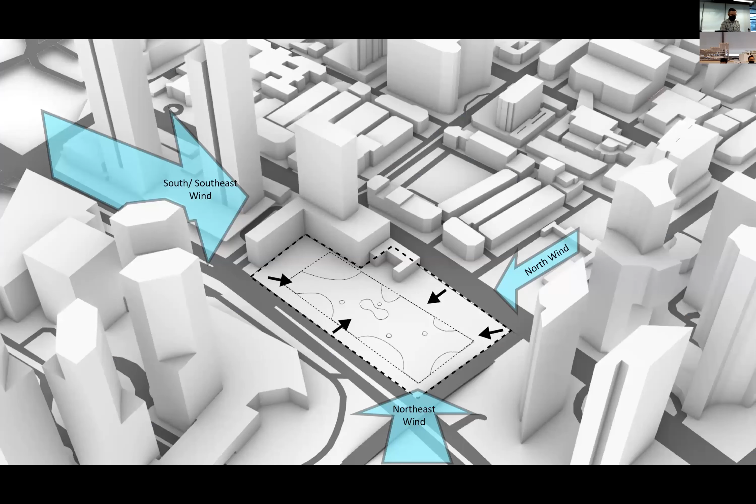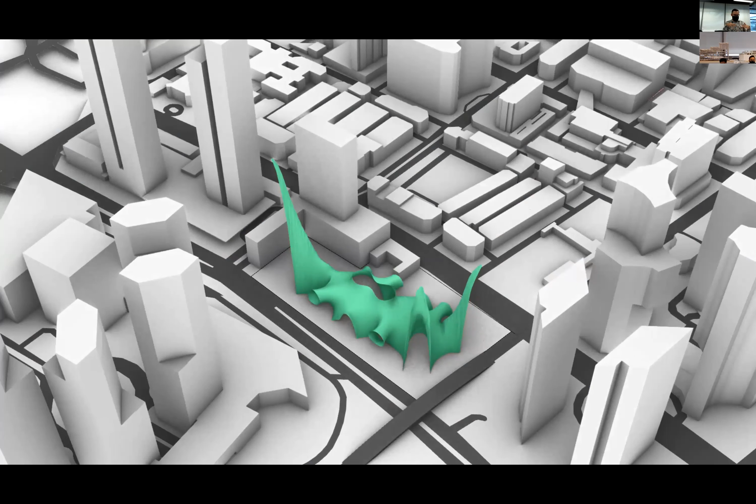So to do this, they took the space that they had and they analyzed how air moved and did a lot of site studies. So this is all different iterations of how wind moved. And they came up with a circulation kind of pattern related to getting into the building view-wise, and then they simulate a big canopy-like machine that basically is a tubular structure to allow air to be sped up into this kind of atrium volume. And the building that's very tall sponsors this open space below.

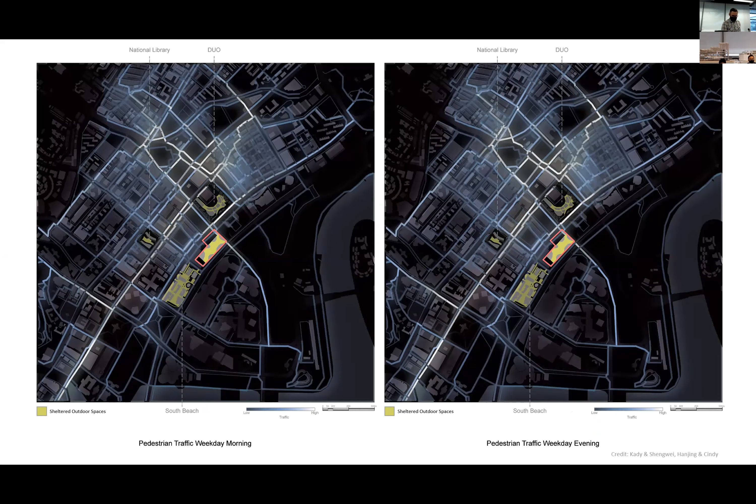That's basically done by having this skin set of structures hung on the inside of the building to create this smooth air-moving machine. The idea is that air will go from higher levels, where it's at a higher speed, and slide down into the plaza and cool it off.

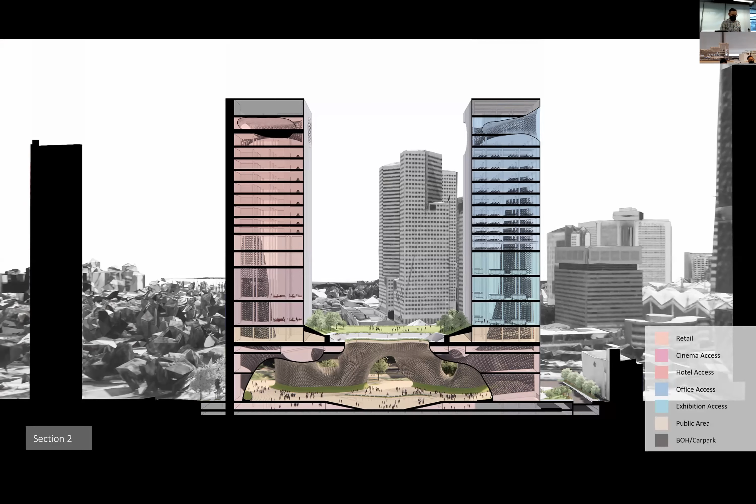These giant towers actually sponsor this big machine for making a public plaza like this, where you have many different kinds of events. It's a little bit like shopping mall atriums, where there are daytime performances or other things like this.

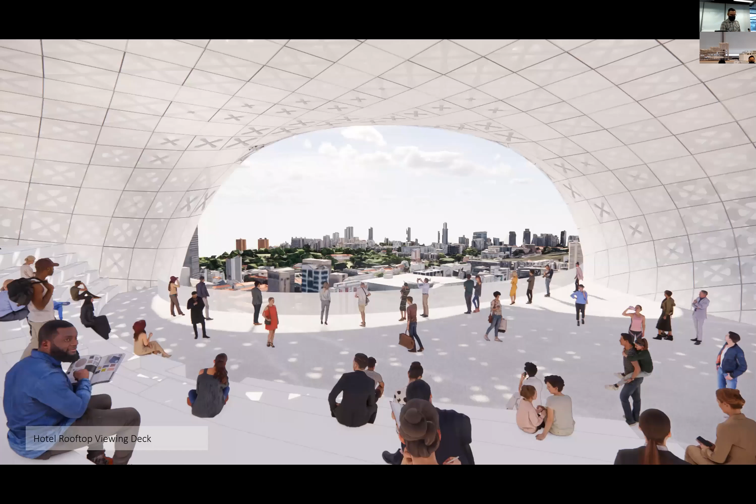This is upstairs - there's a sort of public space for a hotel upstairs. This is the building.

They were inspired by surrealist paintings, where they had different shapes that couldn't be identified in the facade. That's part of their inspiration for making this kind of facade that has shapes in it, but the shapes aren't identified as, say, a window or a door - they have an amorphous shape. So you might make of this building a different kind of thought about what the shape composes.

But that's the last slide for this project.

At the end, I just want to say that I'm really impressed with the students' work, and I found it great that, given the opportunity to be positive and a bit artistic with their technical capabilities, I think they were able to accomplish a lot. Yeah, thanks.